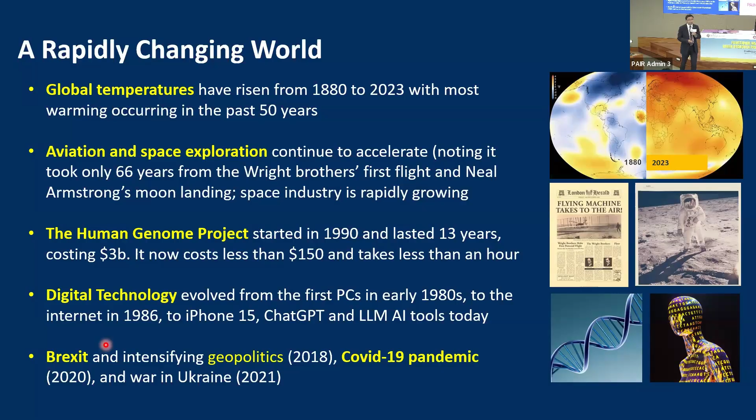But today I'm going to focus on energy and climate. As you've probably heard the term net zero, the net zero world we wish to be in is largely to do with decarbonization of our energy structure. Energy, we traditionally rely on fossil fuels, but now gradually we need to look at how we're going to decarbonize.

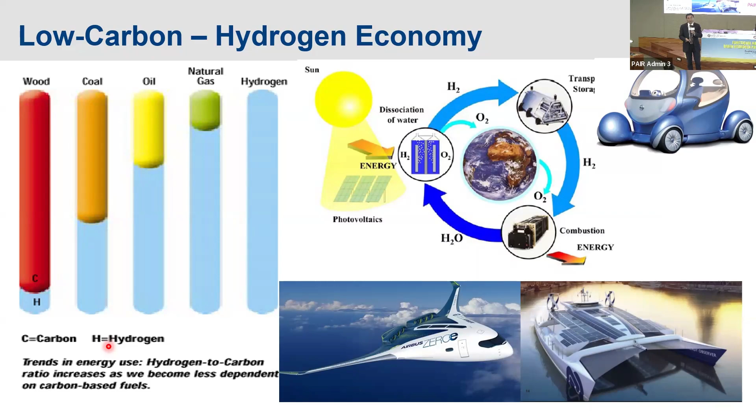Of course, the hydrogen infrastructure, as I'll discuss in this talk, is clearly lacking. Therefore, we need to invest in the infrastructure, including the production, storage, and transportation of hydrogen, as well as utilization, and gradually replace fossil fuels through renewable energy sources, with hydrogen as the cleanest carrier. They will have a major role in transportation, aviation, shipping, and household heating, as well as many other sectors.

The renewable energy route is, of course, through electrolysis predominantly at the moment. The hydrogen can be stored in different mediums, methanol, for example, ammonia, and hydrogen itself. So different forms of storage, which I'll talk about later, and then it's distributed, potentially through existing infrastructure like natural gas pipelines, which is also one transportation route. And of course, there's the utilization and use.

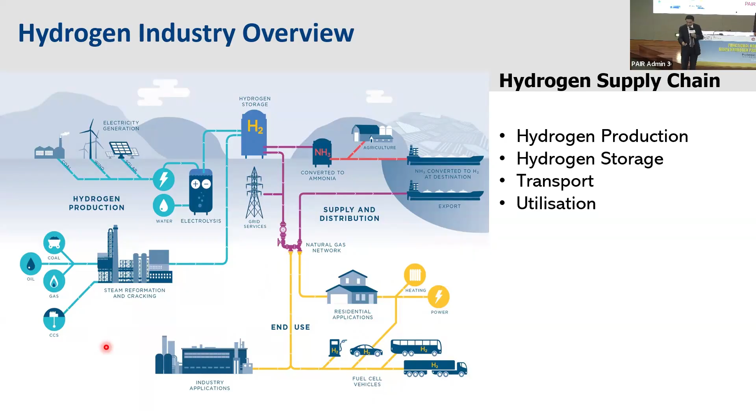So this is the ecosystem. The US DOE, quite a few years ago, almost 10 years ago, developed a roadmap talking about how many decades it would take for the world to really build the infrastructure and roll out hydrogen in a very significant proportion.

In a few years' time, there'll be more investment and more progress in terms of many of the bottlenecks. Therefore, by 2040, if everything goes well, there will be the onset of the true hydrogen economy.

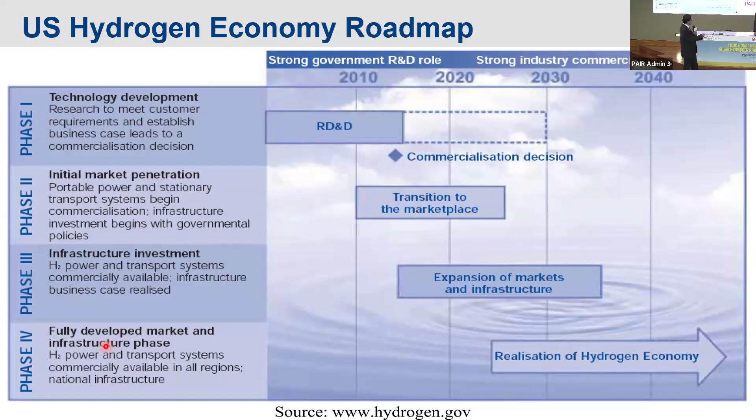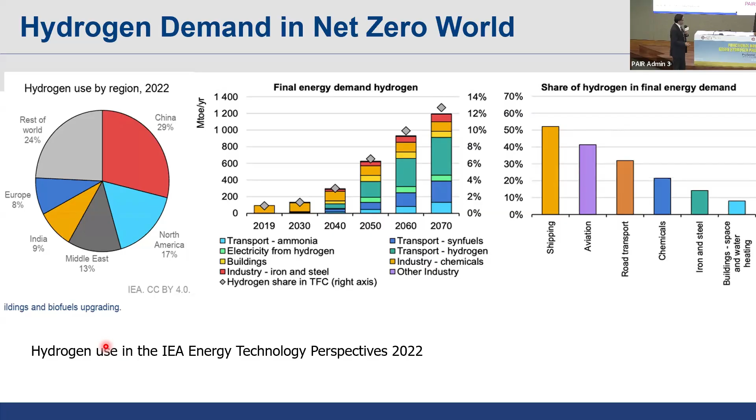I think in terms of the sectors, they are accurate. So shipping is going to be the biggest use of hydrogen, then aviation and road transportation, and then household and commercial use. Of course, hydrogen has already been used in the chemical industry for many decades, in fact centuries, but this projection is very conservative.

Now you might ask why we label hydrogen as green. Hydrogen doesn't have any color, but this is metaphoric. Brown hydrogen is the byproduct from existing industries like refineries. Then, by reforming or cracking fossil fuels, you can obtain hydrogen, but that's called gray hydrogen without looking after the carbon. If you capture and sequester the carbon, it becomes blue hydrogen. Green hydrogen is hydrogen produced purely from renewable energy, such as wind and solar.

To give an idea, 1 kilogram of hydrogen gives you about 1 day's use for a nominal household, American standard, big house - that's about 33.3 kilowatt hours of energy. With 1 kilogram of hydrogen you can drive a normal passenger car about 120 miles, depending on the size of the car. For a normal driving range equivalent to today's petrol vehicle, you need a minimum of about 5 kilograms. Just bear that in mind when we talk about hydrogen storage later.

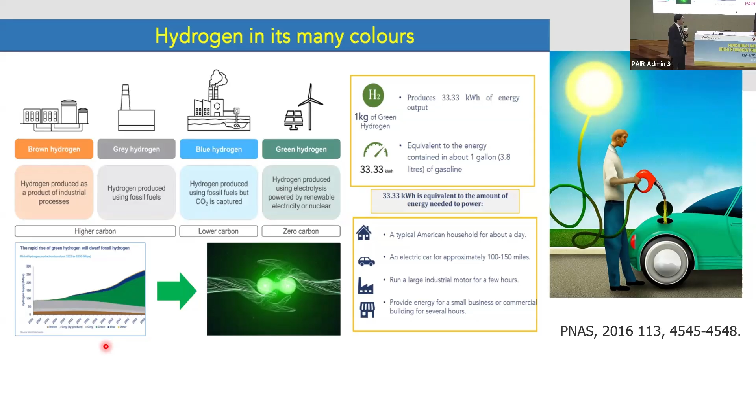I'll probably skip this. The take-home message from the techno-economic analysis of hydrogen production is that it varies from country to country because the electricity cost is different. The second message is that the Chinese are the best at producing electrolyzers - if you look at the world market, 75% is supplied by China, and they are the cheapest. If you have cheaper electricity, of course you get cheaper hydrogen.

At the moment, hydrogen from renewable energy costs typically about $5 to $6 per kilogram, but the US DOE target is $2 per kilogram. So in order to industrialize, it depends on the context of the industry.

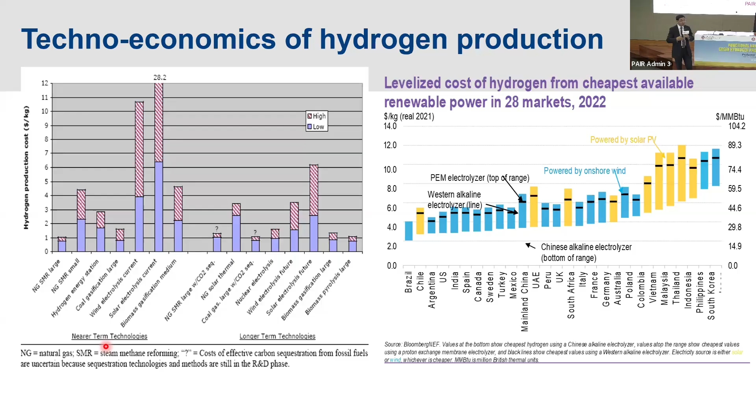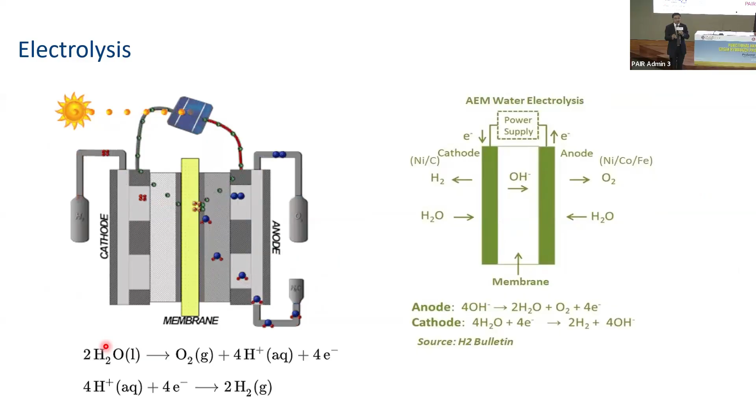This is what this slide tells you - I won't bore you with this, there are many chemists here. So PEM, proton exchange membrane, and anion exchange membrane electrolysis processes - this is very basic electrochemistry for electrolysis. The cost of the whole hydrogen production largely depends on two factors: one is the equipment, the electrolyzer, which is the majority of the cost - currently about 50% or 60%.

Chinese technology is very competitive because of manufacturing en masse and also the cost of electricity. So if you reduce the cost of these two components, you can actually reduce the cost of hydrogen production per kilogram.

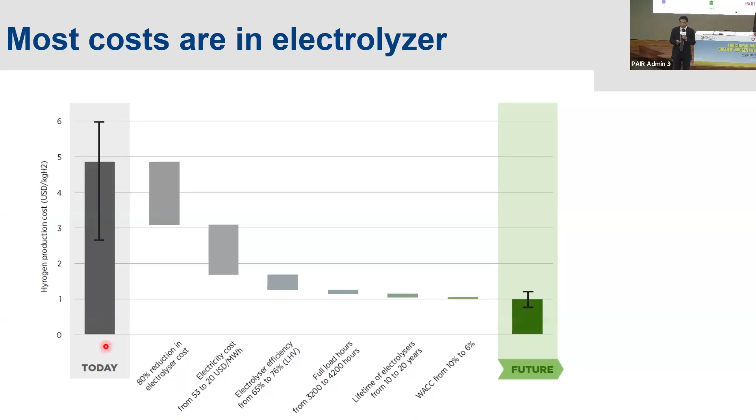If you actually look at high temperature electrolysis, you can theoretically go up to 100%, but then you have a lot of engineering challenges. The ceramic material has a lot of mechanical integrity issues and thermal property issues when applied over a long period of time. So there are many research groups working on high temperature electrolysis because it's not commercially available yet - more at the lab scale. There are also demonstrations, but no mass production of high temperature electrolyzers.

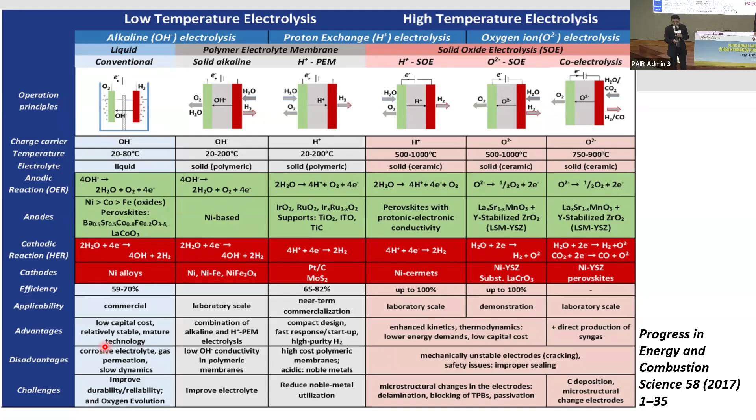In terms of solid alkaline, anion exchange, and proton exchange membrane-based electrolyzers, there are lots of commercial products now, but the cost is still quite high compared to conventional alkaline-based liquid electrolyzers. So looking to the future, we're not satisfied with electricity generation, say PV from solar, going to electrolysis to produce hydrogen - we look towards solar hydrogen, direct hydrogen production in the future. This is the holy grail.

This is why many researchers - I think Professor Yu is here, he's a top expert in photocatalysis - look at whether it's distributed or centralized hydrogen production, moving towards direct hydrogen production. For example, solar thermal chemical hydrogen production or photoelectrochemical production - the long-term goal is to produce this on a larger scale. High temperature electrolysis is one option too. The bubble should grow bigger, but in the long term, these should dominate hydrogen production in terms of systems.

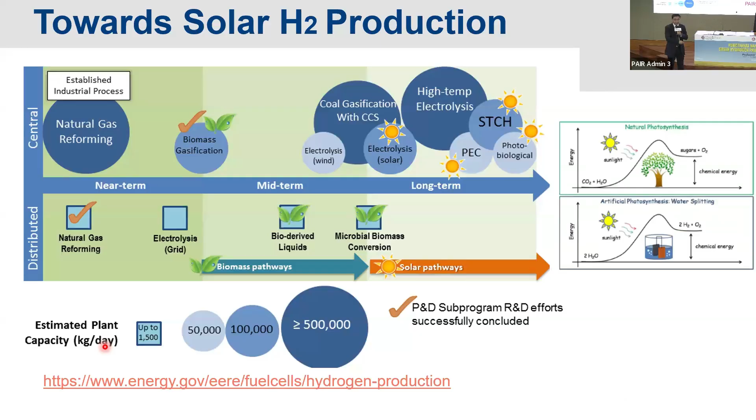Okay, so in that regard, I put this slide to illustrate the progress in photocatalysis, in photoelectrochemical production of hydrogen. So practically at the moment, all the PECs and photocatalysis only give you about 1 to 2%. This is direct solar to hydrogen efficiency, right?

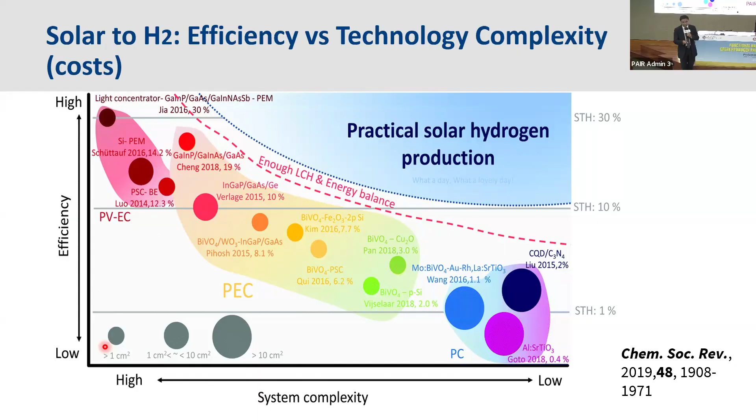But in terms of industrial scale, you need about 10% to reach the viable range, which is in the middle here, so 10%. A lot of the photocatalysts are actually moving towards 5%. This is 2% and then moving up. If we reach 10%, you can have the scale up and in a very economically viable production.

So this is where we've been working on. I think many experts in this room look at photocatalysis. It's really the direct photo to hydrogen conversion using a semiconductor nanoparticle. This is all started by Fujishima in 1972, his first master thesis, right? His master thesis was actually published in Nature, talking about titania as a photocatalyst. That's the first serious paper that was published.

And then, of course, the whole field is burgeoning now with lots of scientific publications. But still, in terms of innovation, there's lots of gap. So the efficiency is really the product of the light harvesting efficiency, the absorption for light, and most of the time semiconductors, wide band gap catalysts can only utilize the UV range of energy.

Of course, there are many researcher groups developing the whole solar array, the solar photocatalyst, including our work. The charge separation transfer efficiency, as well as surface reaction—there's a redox reaction on the surface. So this is the basic mechanism.

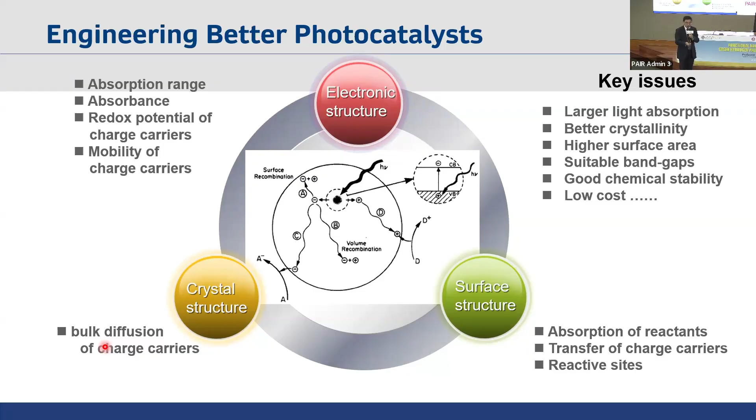So quite a number of years ago, we published this series of papers on the crystallization, how to control the crystal facets, and then the reactivity and the diffusion.

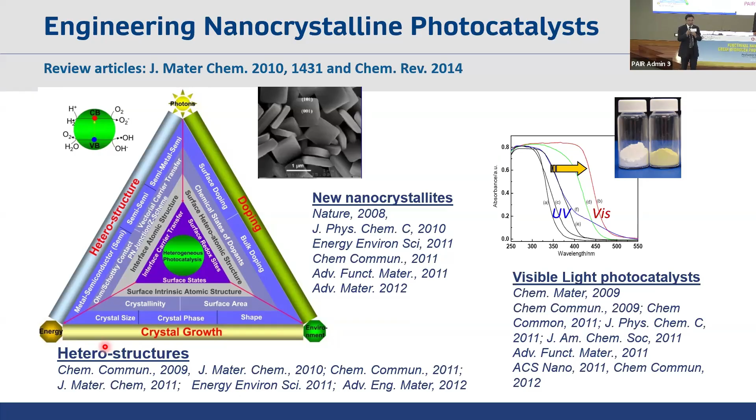So the methods we look at are three predominant approaches. One is heterostructuring, second is doping, and third is crystal engineering. By doing the heterostructuring, you change the interfacial atomic structure, and you enhance the carrier transfer. By doping different inorganic elements, you can change the surface potential, the size, the surface reactivity. And of course, crystal engineering can control the crystallinity and the bulk diffusion.

So there was a paper published in Nature where we look at the anatase crystals, how we can control the different facets, the active site, which is the 001 facets, which is not stable. Michael Grätzel from Lausanne actually predicted this, published in 1998 in Physical Review Letters, that this surface can exist if you can have some method to stabilize it and grow preferentially the 001 facets, and not the 101 facets which inherently exist in anatase crystals.

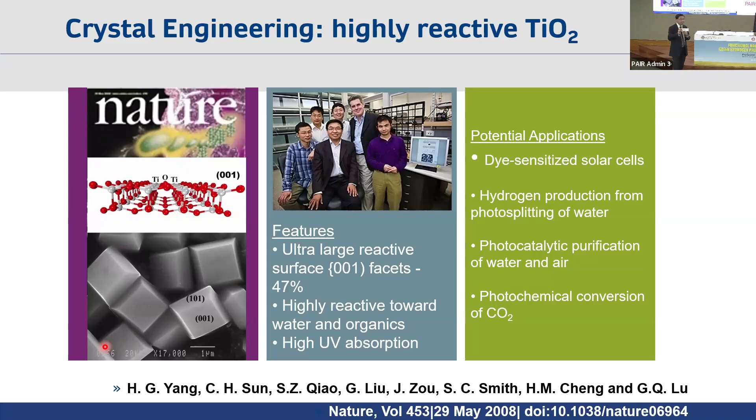So we did this for the first time, and we achieved 47% stable 001 facets, which is normally from 5%. Now it's to 47%, and later there were a number of papers we published. We can demonstrate the crystals are not exactly nano sized, but micron sized, and we can achieve 90% of 001 facets.

And of course, in order to enhance the efficiency for hydrogen production from say 1 to 2% to 10%, this is not easy, because the physicochemical processes happen at different length scales and different time scales, from femtosecond to second, in terms of the photon absorption, then charge carrier separation and transfer, as well as the surface reaction.

But if you have biomass in the liquid, in the water, biomass can act as a precursor for hydrogen production. It's even more complicated, because on the surface, this chemical reaction, the transfer of chemicals on the surface, absorption and reaction will take minutes.

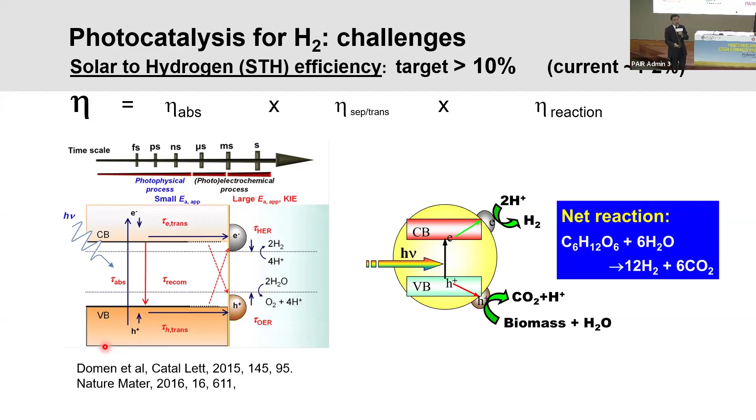So you have this length scale, different scales from the electronic structure to nano, and then to this reactor scale, and then time scale. So you have to really understand which step you want to optimize. This is why lots of studies so far have focused on the optimization.

But there's another approach. Another approach is to really couple the photovoltaic with the photoelectrochemical process in tandem together, so you minimize the losses of the energy.

This is one of the works by my former student, Liu Gang, who's now director of one of the Chinese Academy's Institute of Metals Research. He did this beautiful work a few years ago. He actually combined the co-catalyst, nickel and iron oxide hydroxide, as the co-catalyst with dual photoanodes coupled with perovskite PV. He achieved, I think, 6% or 6.5% in terms of direct solar to hydrogen production, which is very encouraging.

Now I think a lot of people repeating this work have also achieved about 7%, getting closer to the 10% which is a commercially viable approach.

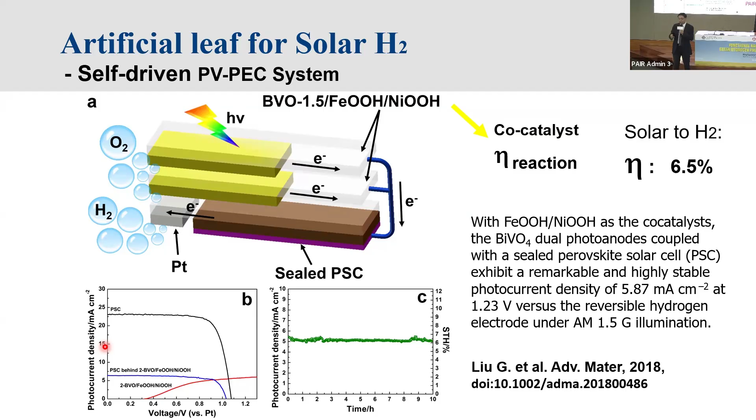Now I think I've talked enough about hydrogen production, but I think in terms of the infrastructure, the bottleneck is storage. As we all know, you can produce hydrogen economically and effectively, but you have to store it, you have to transport it.

At the moment, many people know that a lot of buses running on hydrogen fuel cells use a compressed tank. With all these people who are experts in structural materials and composites, carbon fiber, you can go up to 700 bar, and you can compress 5 kilograms in a small tank.

You can use that, but I think the cost of that container, the system cost, is still very high. Number two, psychologically, people associate high pressure with safety risks. People don't want to carry a bomb at the back of the car.

So therefore, to continue research on low pressure hydrogen storage — and I think high pressure is also safe in my view, but perception-wise — safe materials to store hydrogen to meet the needs of transport, particularly cars, is a very important topic.

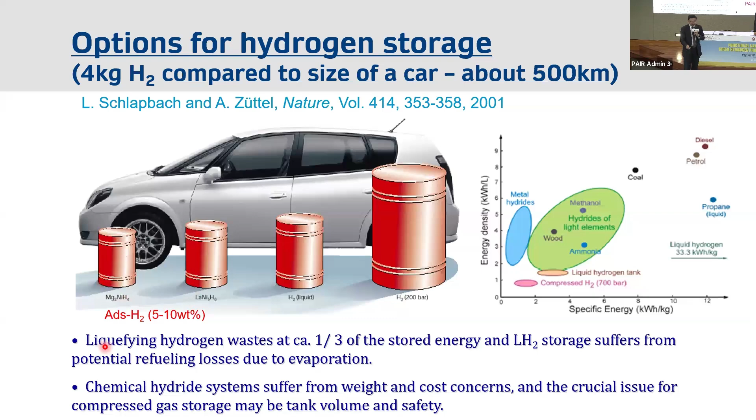The US DOE also has a roadmap, a more recent roadmap for hydrogen storage infrastructure in terms of the system capacity, the system cost, storage cost, and then the kinetics — the charging and discharge time required. On the left you can see the different states: compressed hydrogen gas illustrated here, and the liquefied hydrogen. Then here are the different states of absorbed or chemical bonded hydrogen in solid materials — you can generally call it adsorbent, or catalyst.

So that's the illustration. But the US DOE's target is approximately 5.5% by weight, and by system volumetric capacity there's a specification. The cost target is $300. So this is not really big, but so far no one has commercially met the DOE target — this is the year 2025. Charging and discharging, of course, should be comparable to refueling at a petrol station, so within a few minutes, 3 to 5 minutes, preferably 3 minutes.

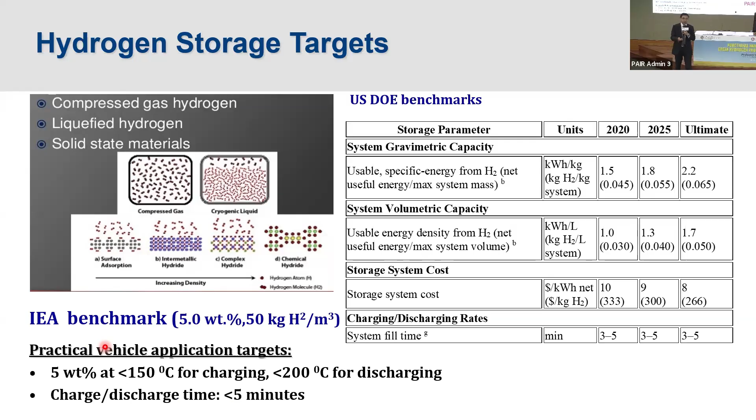So we have been working on this for a while. And in fact, we stopped. Now someone else picking up, I think, made huge progress. So we published this paper almost 20 years ago, and we have subsequently patented this.

The catalyzed system uses magnesium hydride, which is quite a conventional hydride. It's a metal hydride. Metal hydrides give you good kinetics, good volumetric density, and are also very cost efficient. It's very cheap to make magnesium or lanthanum nickel 5. So the catalyst plays a role to enhance the kinetics, as we all know.

We achieved this at that time, almost 20 years ago. At that time, we met the IEA target, but the DOE target still had some gap. That used vanadium, titanium, and a bit of carbon nanotubes, 0.001%. Carbon nanotubes actually play a significant role. We got to 5.2% by weight, but in 15 minutes. So there was still some gap between the DOE target and that result at the time.

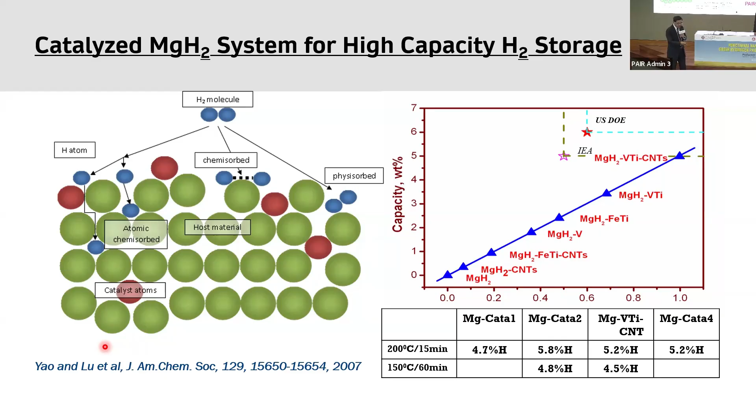However, I was very pleased to meet Professor Zou Jianxin, who's from Shanghai Jiao Tong University, just last year. He came to visit Surrey. He said, 'Max, did you know that we learned so much from your paper? Now we commercialize it.' So Shanghai Jiao Tong produced the first multi-ton storage using magnesium hydride.

And of course, he doesn't want to tell me what catalyst they use. He said, we use a different catalyst from what your paper used. But nonetheless, very pleased, because we actually licensed our original technology to Hydrexia, and they actually bought Hydrexia. The company they spun out in Shanghai Jiao Tong, called Fusan, bought Hydrexia.

You can see this is their demonstration on a big truck with Hydrexia's name on it. They achieved 7.6% at low pressure and low temperature, ambient temperature. The system can actually absorb 900 kilograms of hydrogen. This is a lot of hydrogen.

The predominant use for this will be shipping. Shanghai Jiao Tong is also a very top institution which specializes in shipbuilding, so this is a perfect combination for that kind of application. Shipping is going to be the biggest sector for hydrogen in the next couple of decades, because shipping consumes so much fossil fuel at the moment, uses so much energy, and the marine pollution is really, really serious. I think they won a big award at the IEA Hydrogen Technology Collaboration Program Award last year.

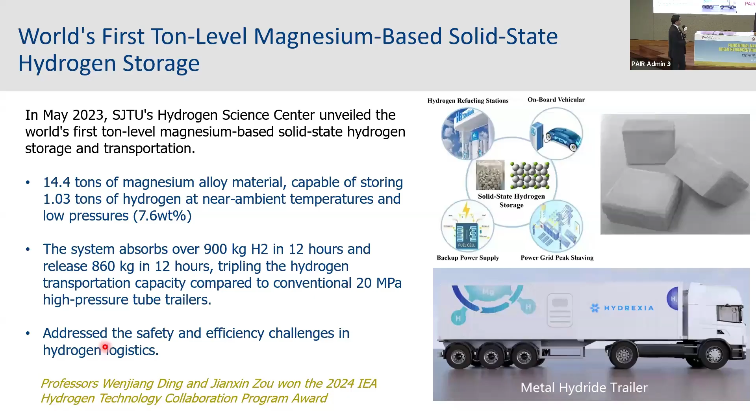They gave the award to Professor Ding Wenjiang and him. Ding Wenjiang is an academician at Shanghai Jiao Tong, and he picked up the award for this commercialization, which is fantastic. So we stopped doing research in this area for quite a number of years, but I think it's great to see how this field is evolving, becoming more commercially viable.

However, just the last couple of slides to summarize hydrogen storage and where this will go in the future. I actually like this, even though it's an old review paper. If you look at the various systems, from conventional hydrides like the magnesium hydride I talked about, to complex hydrides, to sorbent systems, the MOF5, MOF5, and many other physisorption-based systems, and chemical hydrides.

In terms of red, yellow, green for the various technical parameters, from volume, gravimetric capacity, to reversibility, the thermodynamics, which is the energy required, and then kinetics, charging, discharging time, and efficiency, the conventional hydride is probably still the best. The kinetics and the gravimetric density will limit it for long range application, you can't have long range application.

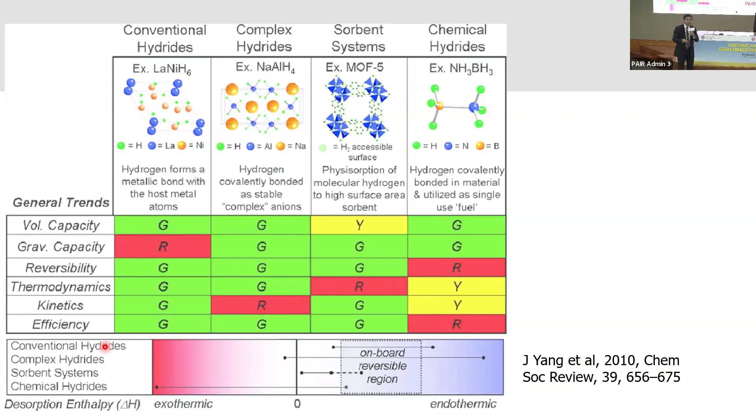However, for the more complex hydrides, the kinetics is actually the burden, so you have to improve the kinetics by using a catalyst. These two systems, a lot of people are trying to commercialize. And in the future, of course, there are many ongoing studies still trying to search for the optimal hydrogen storage materials.

Including Professor Yao Xiangdong, my former postdoc, who's now at Zhongshan Sun Yat-sen University in Shenzhen. He's the dean there. He did a review a few years ago looking mechanistically at where the virgin, unexplored areas are, where's the most productive direction for optimizing hydrogen storage.

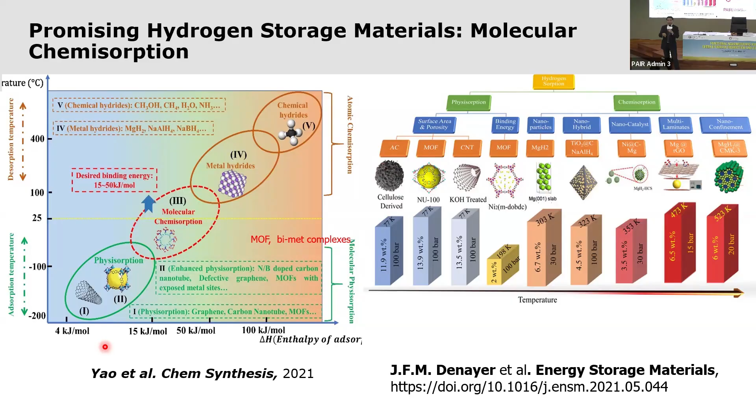He pointed out, actually, looking at molecular chemisorption as a cluster, that's the mechanism. MOF bimetallic complexes is the way for the future. So lots of articles and research papers are now coming out in this area.

Having talked about hydrogen production using nanomaterials, and in fact functional materials involved in hydrogen production, and the storage materials as discussed, for us as scientists and engineers, why do we do such research? What do we want to achieve for society?

I often ask my students and postdocs to think about this question. We want to make a difference—an impact to industry, the economy, and society. But in order to do that, many of our students actually got lost in the trees, not seeing the woods, not seeing the big picture.

So how do we take a market-driven approach, a societal needs approach? This is what we should learn from the carbon fiber, carbon composite industry that started in the 70s and gradually commercialized using this approach. The market needs were very clear. Then you look at all the properties, study materials from a systems approach down to materials, atomic, mechanistic approach, and you go in a loop, iterating to optimize. Eventually you can get the materials perfected and applied on a commercial scale.

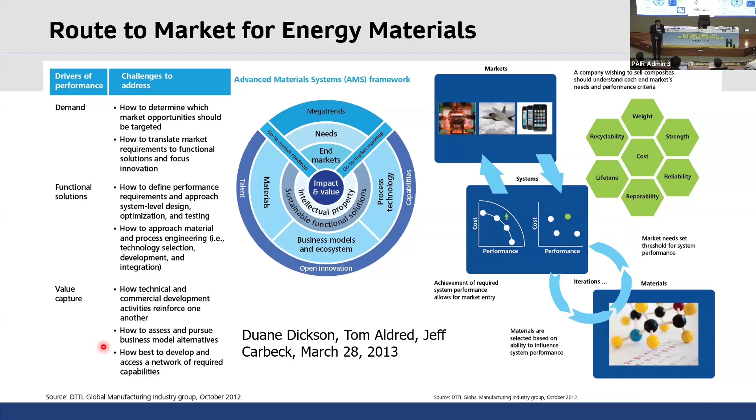Professor Lu gave a very inspiring and clear lecture. I didn't realize you have published so much as a president of a university—this is really amazing achievement, but it's all pioneering work. It's very impressive to learn that Shanghai Jiao Tong University could, based on your research, make this into reality. This is a wonderful achievement.